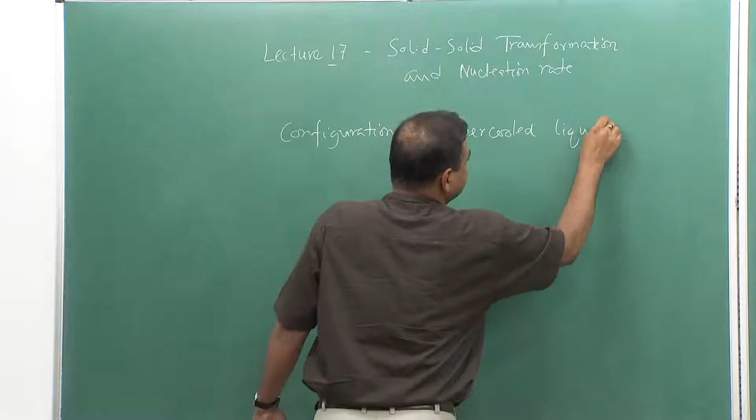But the classical definition of glass, if I consider, the definition is configurationally supercooled liquid. Configurationally supercooled liquid is basically a glass. From this definition, it is very clear: it's a liquid which is supercooled, and it's configurationally supercooled, meaning the liquid configuration is supercooled, and it forms a solid which is a glass.

This is a solid. In a short discussion, if we start cooling a particular material, let us say temperature, and this is melting point, and this is if we consider the viscosity. Generally, the viscosity variation of liquid form has a nature like this, which is actually related to Arrhenius increase, and a more refined situation for viscosity change with undercooling.

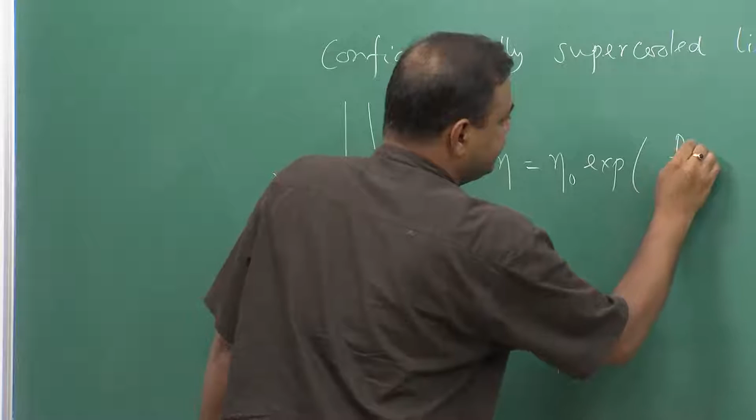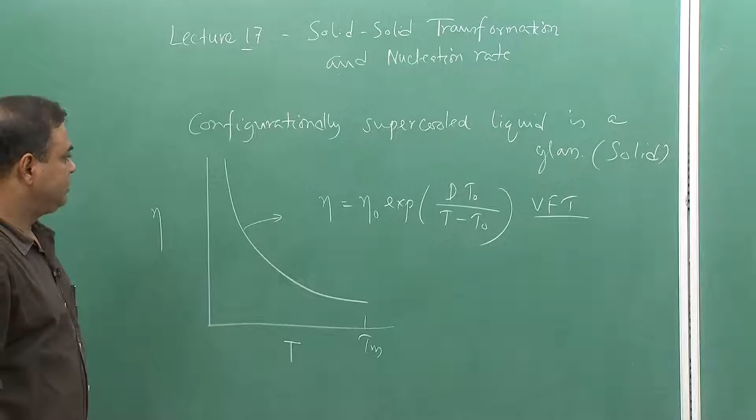We relate to η0 exponential, dT0 over T minus T0. So this is called the VFT equation, which is the Vogel-Fulcher-Tammann equation, and there this is called the fragility of glass.

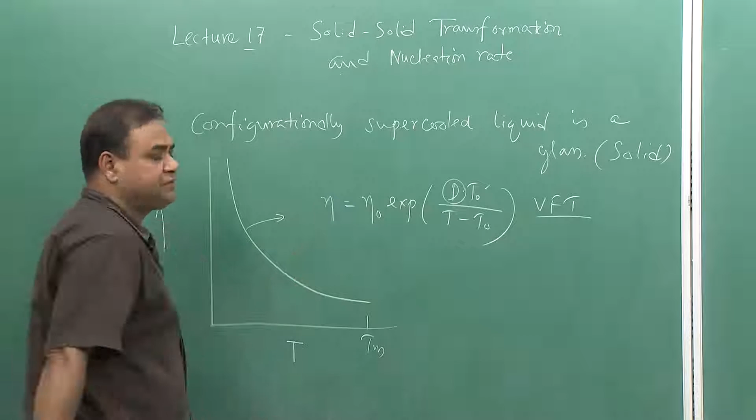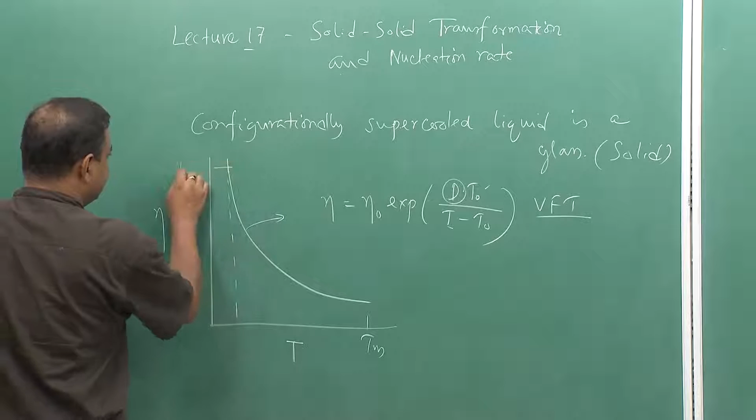Now this is a temperature which has a relation to glass transition temperature, and this is the temperature below Tm. Now if we see this viscosity, whenever viscosity reaches a value of 10 to the power 13 to 10 to the power 14 Pascal second, that temperature we call Tg, the glass transition temperature.

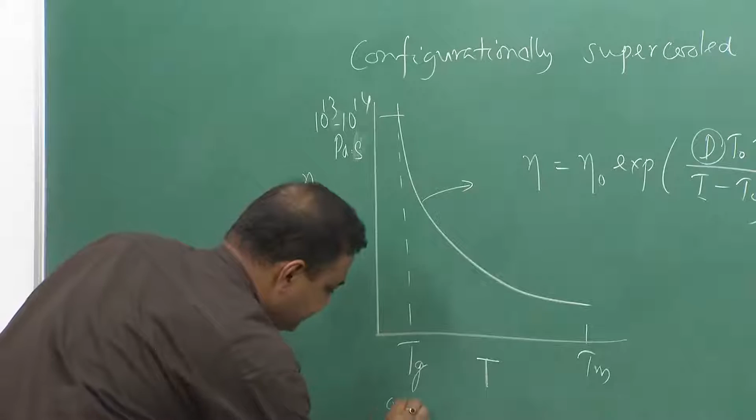Glass transition temperature. So at that time, whenever this viscosity reaches there, as we keep undercooling the liquid, it immediately stops the shear movement of atoms, and whenever the shear movement of atoms stops, that time we can call it a solid. So the liquid, without transforming to a solid of regular atomic structure, goes into a solid where the liquid configuration is maintained.

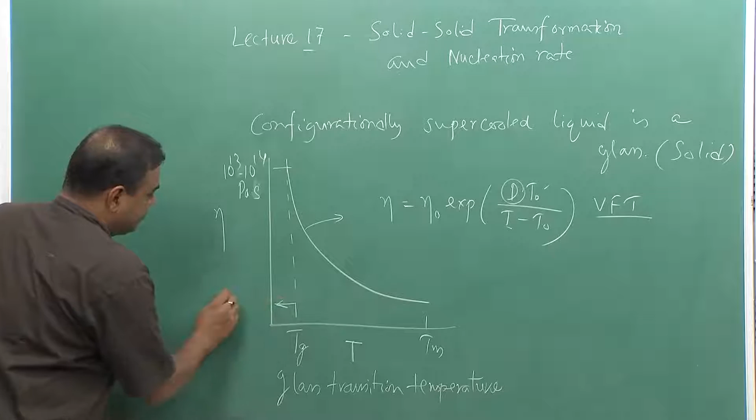So that is what is called glass. So below this temperature we form glass, and Tg is the glass transition temperature where liquid converts to solid. So this is a kind of situation where we do experience glassy alloys, and at that time the solid-liquid transformation is a critical issue.

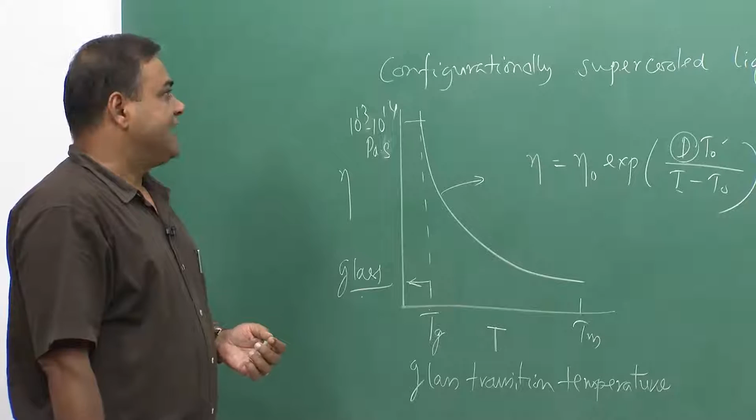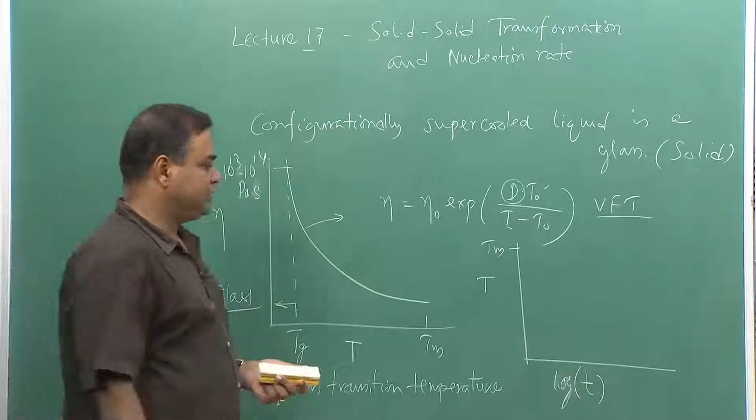At that time we can also construct a TTT diagram for solid-liquid transformation. If this is Tm, and generally we consider this axis in the form of log, because this time can become a large value, it can reach 10 to the power 5 seconds. So in order to put it on the same axis, we take the time as log.

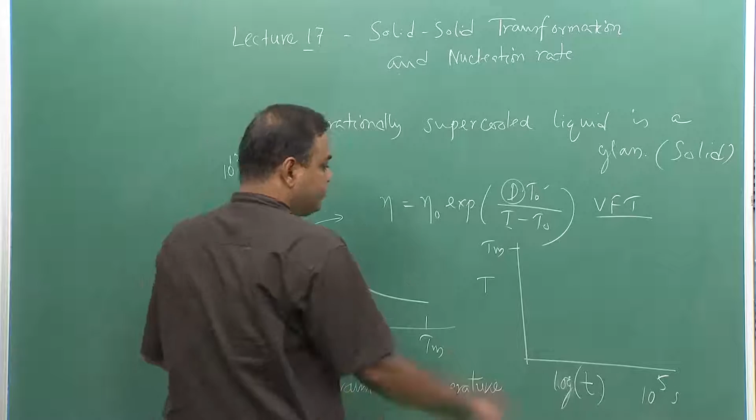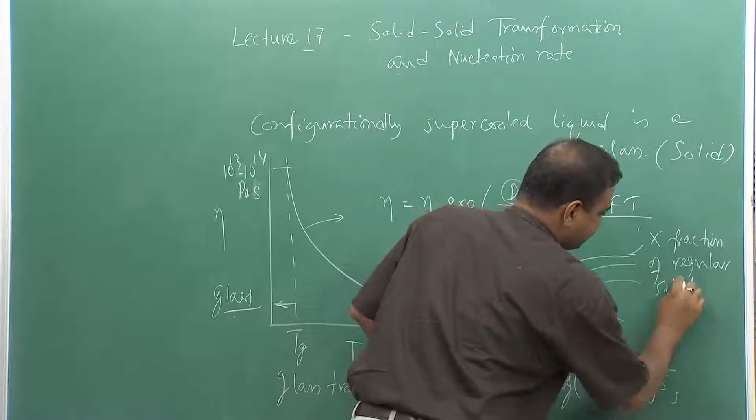So then the graph becomes like this. This is also a C curve, and these particular lines are indicating the fraction of transformation, which is regular solid formation. Regular solid means it's basically crystal.

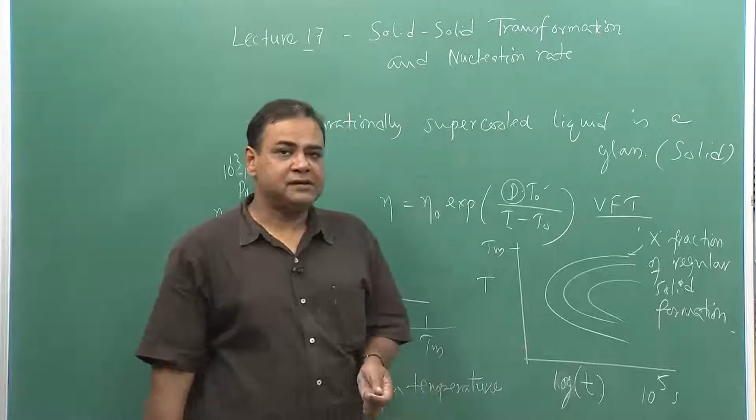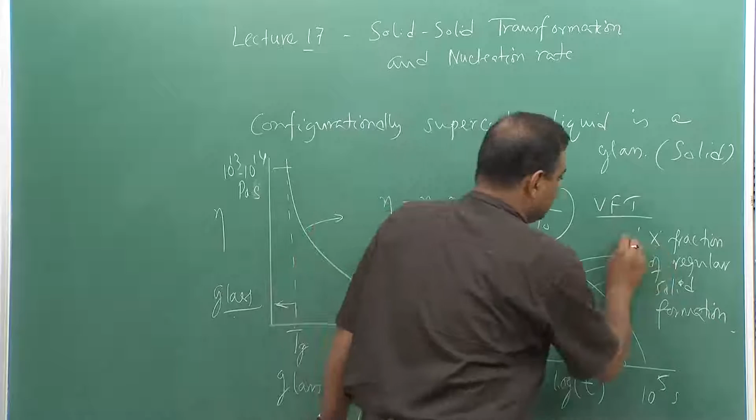In case of metallic systems, we do experience crystal and liquid to glass transition, and at the same time liquid to solid transformation at a different cooling rate. For example, if I see the cooling rate, then if this is my Tg, below this particular x value, if this x value is close to 10 to the power minus 6, then we say that below that point we cannot measure the amount of crystal.

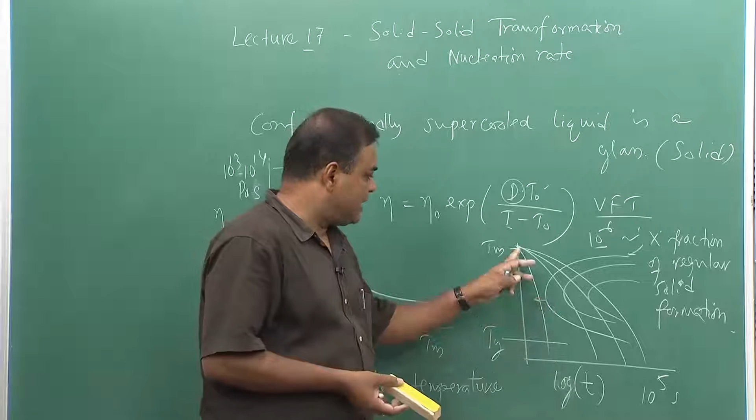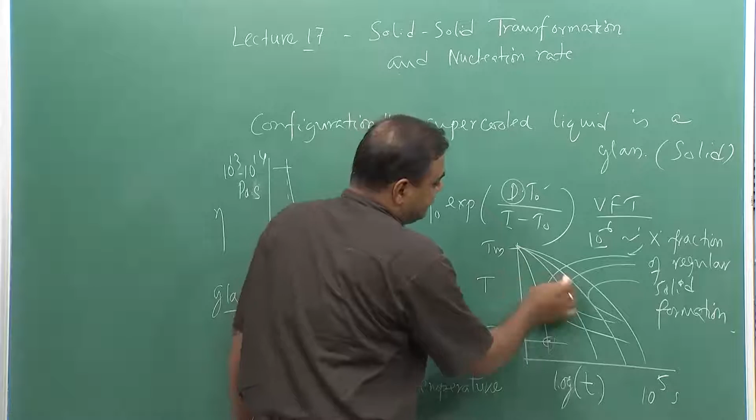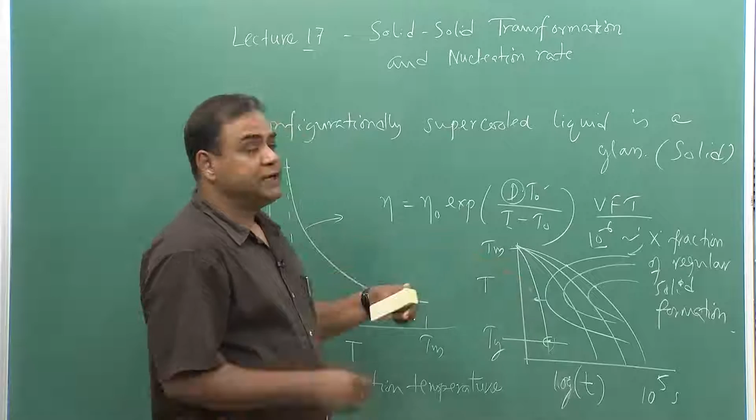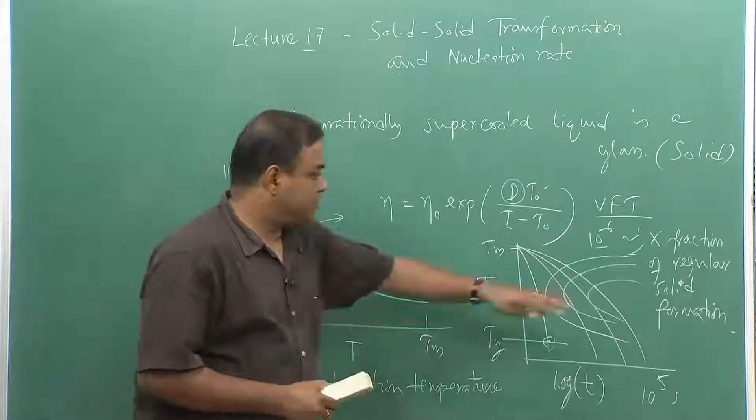That time we can consider it to be a liquid, and if my cooling rate is pretty fast, I can cross this particular C point, the maximum, the nose point, and then take this liquid to this temperature where glass formation is possible. But at other cooling rates, we see different fractions form, and whenever this cooling curve crosses any of those fraction lines, we say that much fraction of solid has formed in the liquid, and the rest remains liquid. This situation involves the solid-liquid transformation process, where the I value we calculated would be needed to plot this diagram. Of course, there will be one more parameter needed, the growth rate, which we will come across once we consider the nucleation rate.

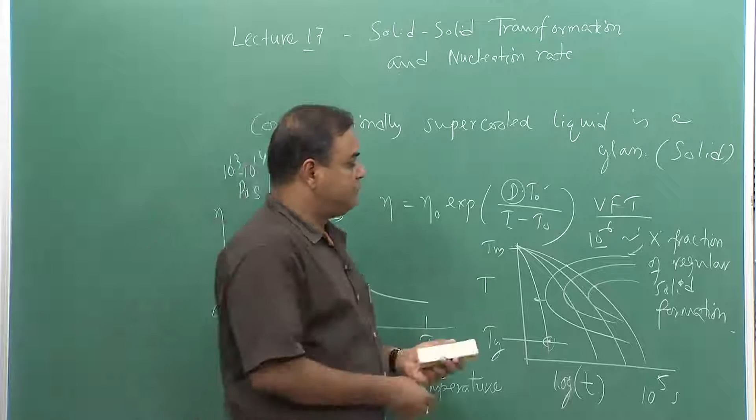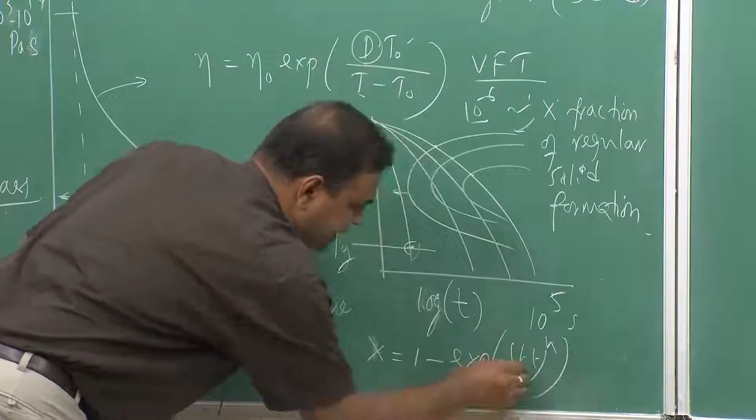As we have seen in earlier lectures, the expression x equals 1 minus exponential of minus kt to the power n, where k involves I as well as U. U is the growth rate, and that is what we need to measure, I as well as U, in order to get this TTT diagram. This TTT diagram will be valid for finding the kinetics of phase transformation from liquid to solid.

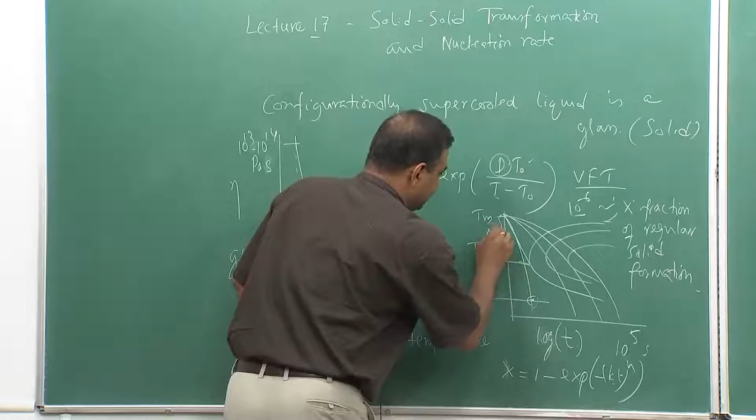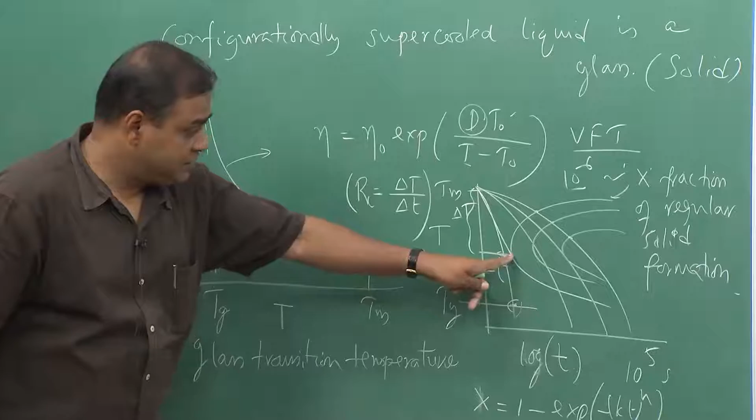So this is a kind of use of that I measurement. Of course, we will start looking at the growth rate soon. Finally, we can see whether the liquid can form glass or not, or whether it forms some crystal, and what would be the critical cooling rate for crystal formation. The critical cooling rate, Rc, is measured based on del T. This critical cooling rate means that if cooling rate is greater than this, moving towards the left, liquid would remain as liquid. So then I can take the liquid to the glass transition temperature, and it will form glass.

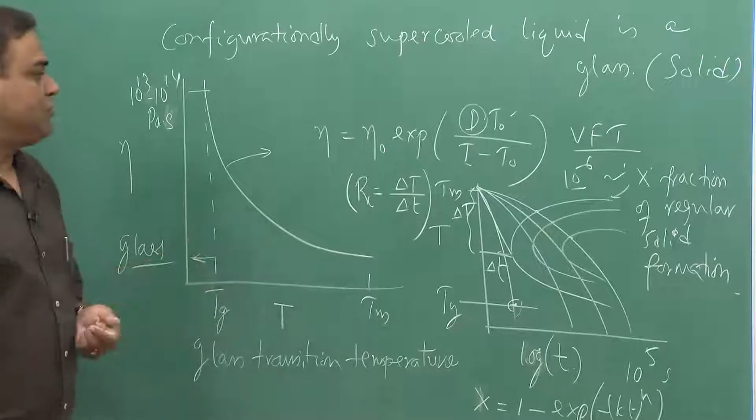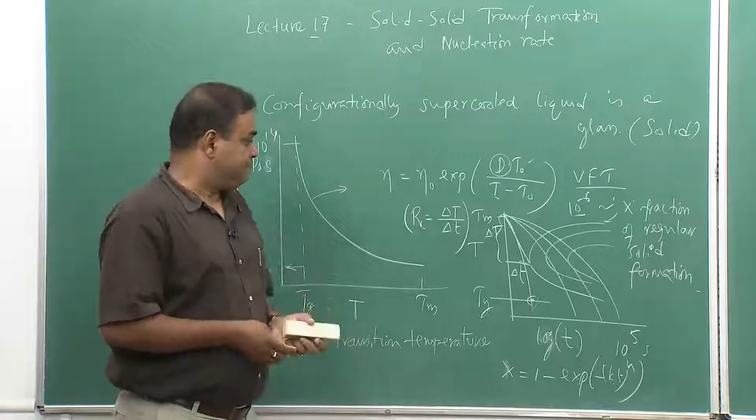This information will be taught in later lectures, but let us go to solid transformation, where we will also look at the nucleation rate expression, and before that see how the nucleation treatment is handled in case of solid transformation.

In case of solid transformation, the treatment would be almost similar to solid-liquid transformation, but there will be a little difference, and that difference comes in the form of strain energy. In the solid-liquid case, we did not experience this strain energy term, but here we do, and that makes a lot of difference. At the same time, the interfacial energy in the previous case was simpler, since half of those bonds are broken, but in the solid case it will be a little complicated. We will philosophically discuss why this interface energy becomes complicated.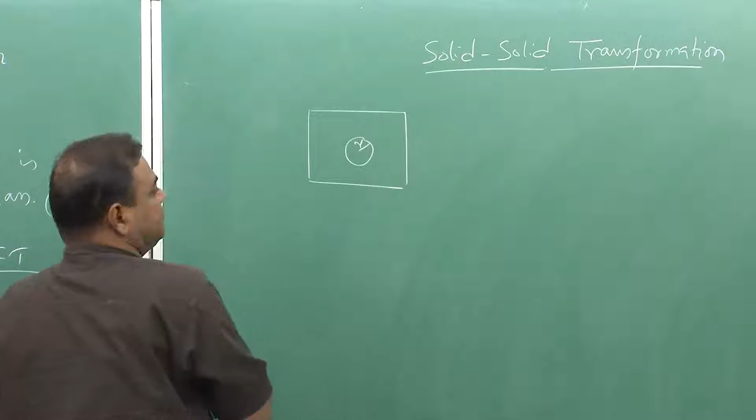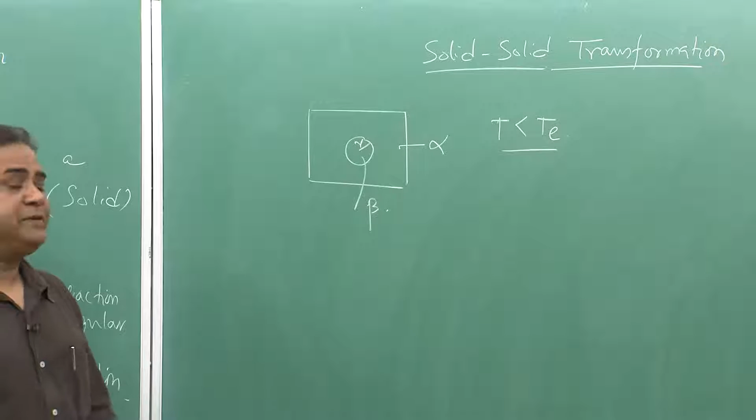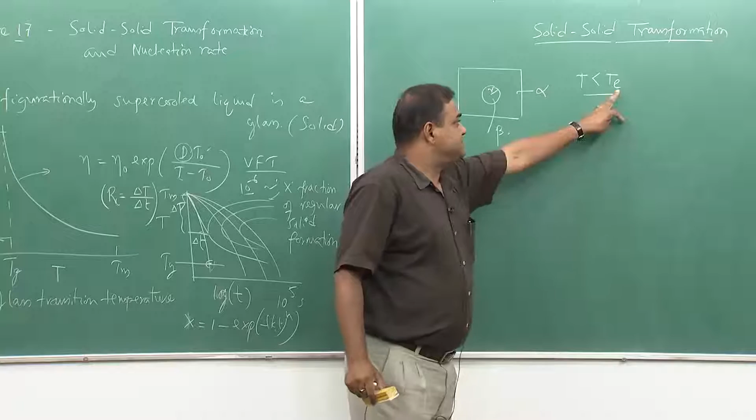If I try to see in case of solid transformation, initially we can consider homogeneous nucleation. They are also sphere forms of radius r, and that solid is basically termed as beta, forming in alpha at a temperature less than the equilibrium temperature. I am putting not Tm, but rather the equilibrium temperature. Tm is also an equilibrium temperature, used for melting, but here the transformation equilibrium temperature is Te. At this temperature, which is less than Te, the transformation takes place, with beta forming in a solid of alpha, and the interface forming is gamma alpha beta.

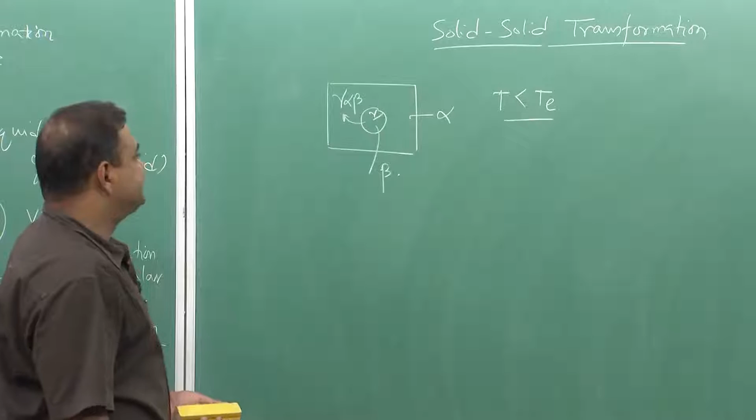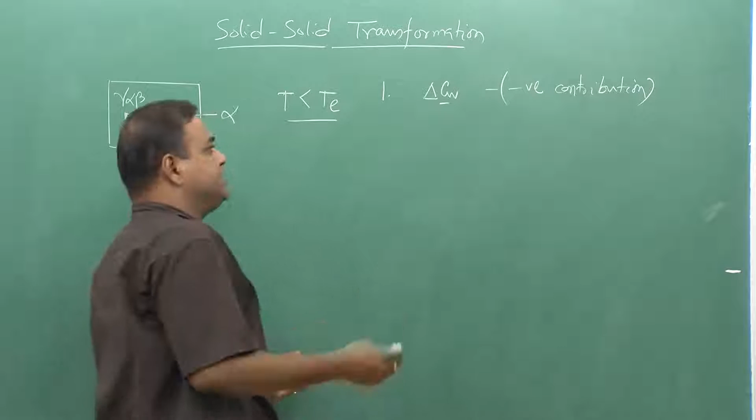Now what are the energy terms? Here also, in the beginning, we are not considering volume change. This volume is the same as before, and there is no net volume change. Now if I try to see the energy contribution, one is delta GV, which is a negative contribution, as we have seen in case of solid-liquid transformation. The second part is surface energy in joules per unit area, and that is gamma alpha beta, which is a positive contribution.

Positive contribution.

Now, if I try to see the total energy, that means if this volume is V, so it would be V delta GV with a negative sign, and if the area is A, so A gamma alpha beta. This is the total energy.

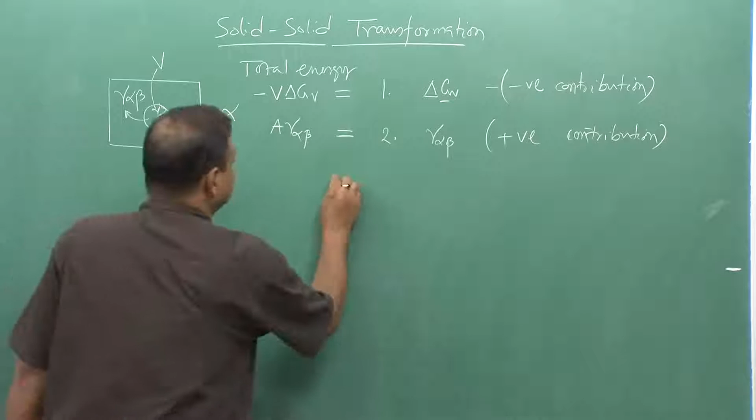Now, similarly, there will be a third contribution, which is the strain energy. Now, where does this strain energy come from? We call it delta Gs, and interestingly this becomes positive. Now we need to see why these positive terms come.

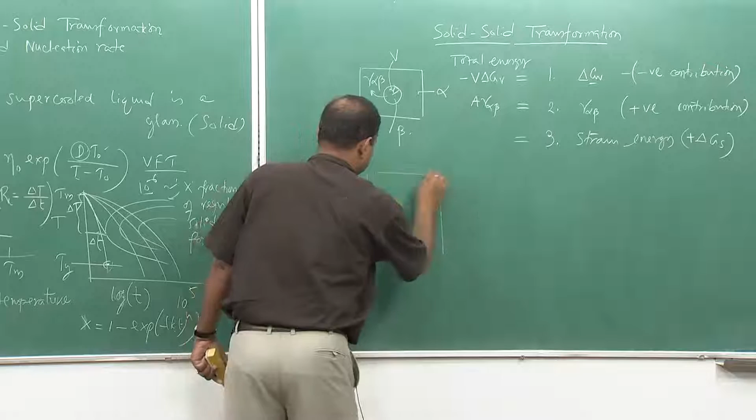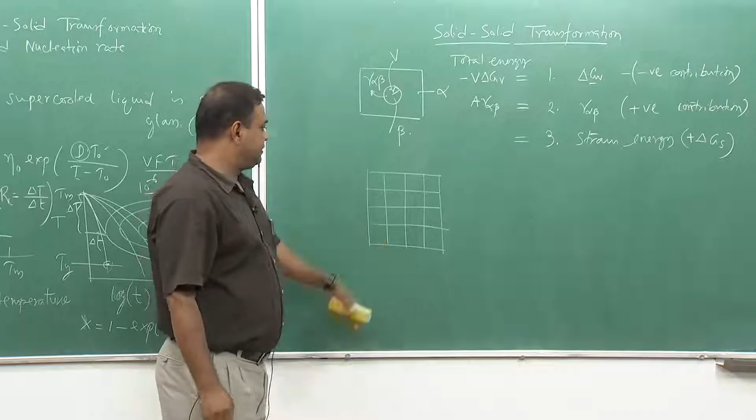Now if I try to see a solid, we can extend it in 3 dimensions, but let me do only the 2 dimension part. We see that if the solid is a regular crystal, the atoms are arranged in a periodic manner.

Now if this is the alpha phase, there could be a second phase which can appear. This second phase can appear like this in this volume, and if this is the alpha lattice parameter, A alpha, and this is my second phase, which is beta, then in case of beta, the lattice parameter is A beta.

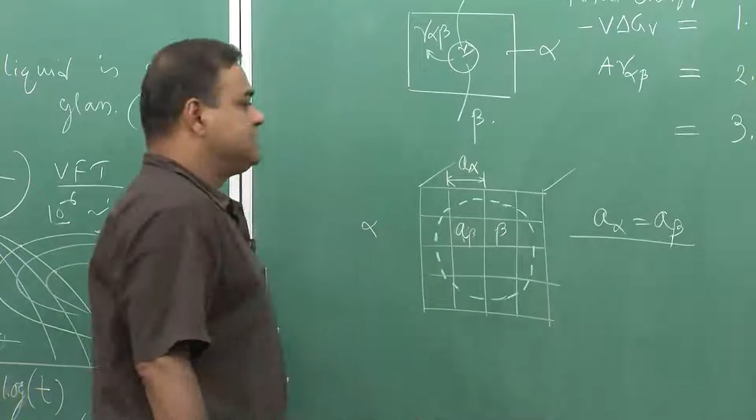From this it is clear that there is no volume dilation, because before beta formed, everything was alpha, and after formation of beta, this lattice parameter does not change. So A alpha equals A beta, meaning the lattice parameter of the parent phase and the product phase are both the same, and at that time there is a perfect alignment of those planes.

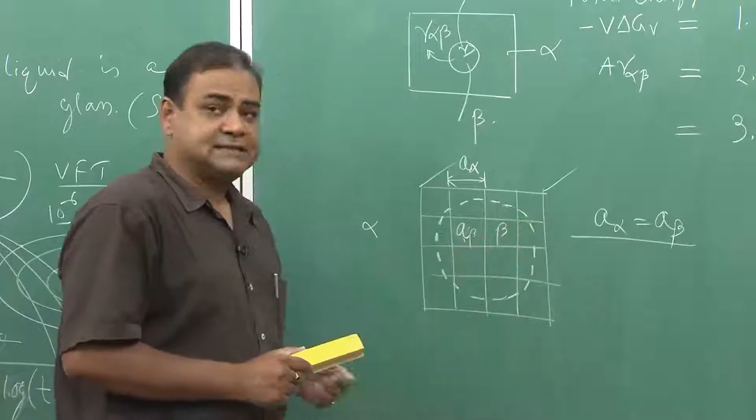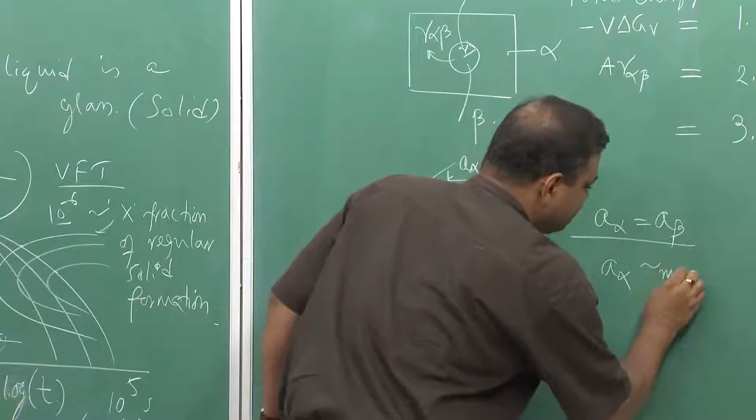But whenever we have a perfect alignment of those phases, it is not necessary that there would be a perfect alignment of these lattices throughout the body. It may happen that A alpha is slightly more or less than A beta. So the situation would be a little different.

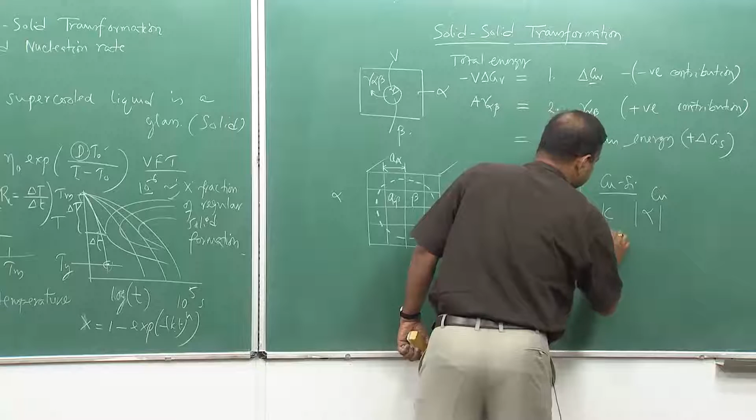Now whenever we talk about this situation, it can happen either in a pure metal or in an alloy system. For example, to see a complete match, let us take copper-silicon alloy, where we form a silicon-rich phase, kappa, while copper is the parent phase, alpha, and silicon-rich kappa is the product phase if it forms.

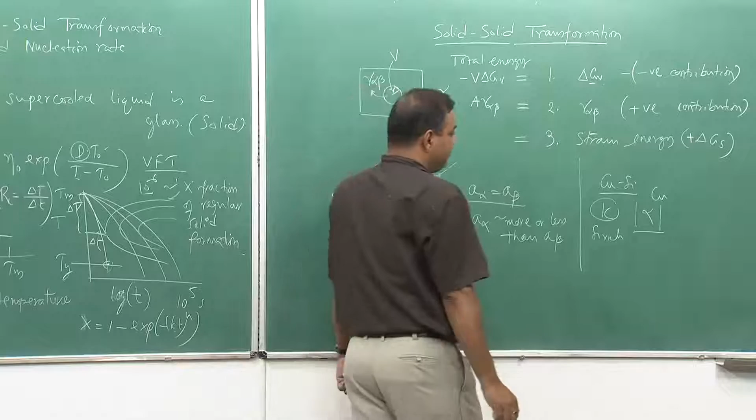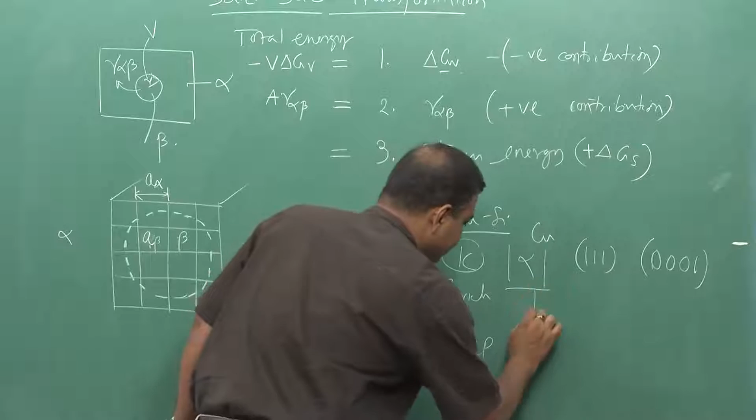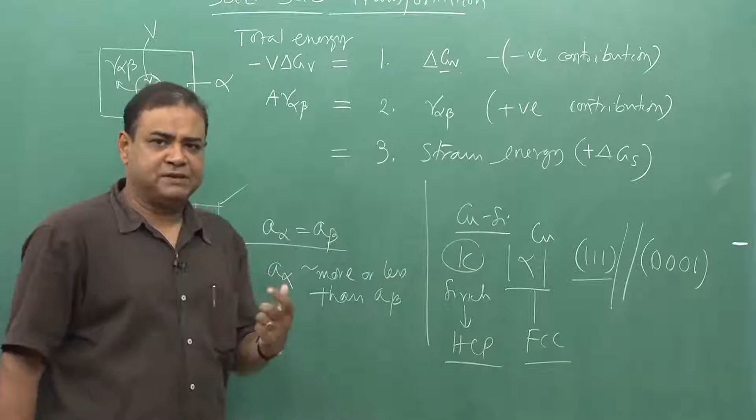So we see the 1 1 1 plane as well as the 0 0 0 1 plane for these two planes of this crystal, because this phase is HCP and this one is FCC, hexagonal close packed and face centered cubic respectively. This plane and the basal plane of the HCP are parallel, and at that time these two atomic arrangements have absolute similarity, so in that case they will have a perfect match.

And at the same time, the 1 1 0 plane would be parallel to the 1 1 2 bar 0 plane, using the direction notation. So this would be the situation. Now how does this come about? Let us look at that part.

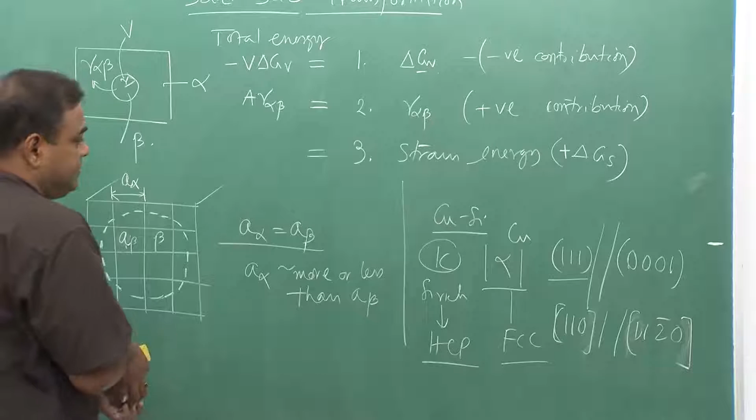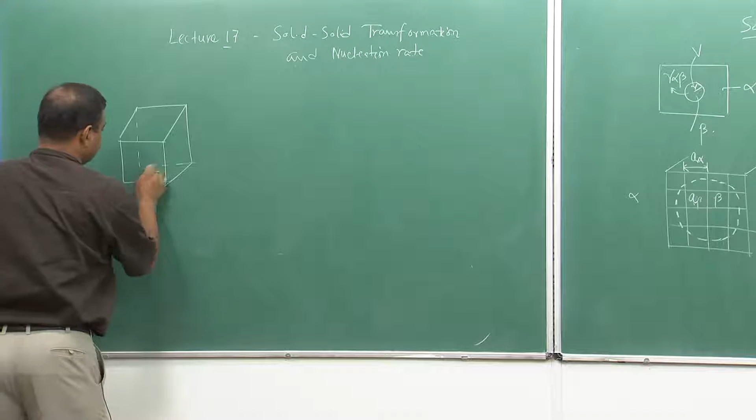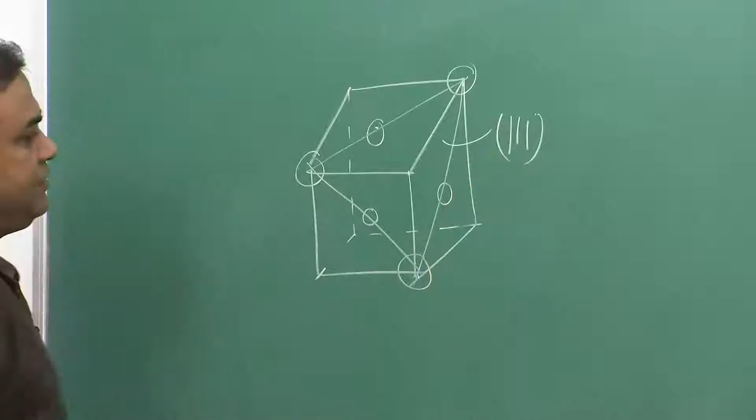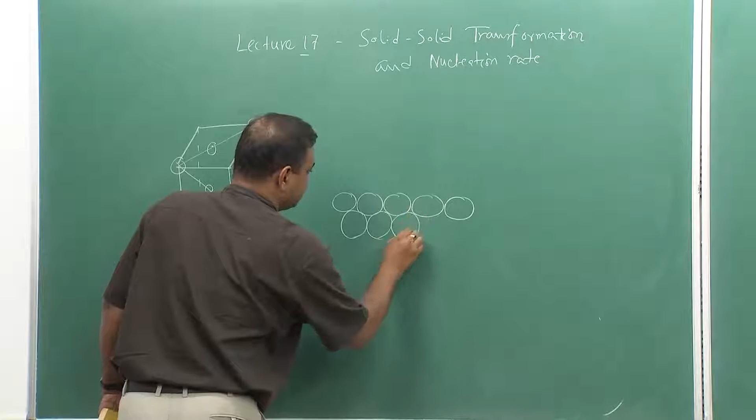Now if we see a face centered lattice, let us say this is the 1 1 1 plane, the atomic arrangement would look like this if I start drawing it. Now, looking at the plane where these atoms lie, this is the face centered plane, this is the face centered plane, this is the face centered plane, and these are the corner planes. The atomic arrangement is like this.

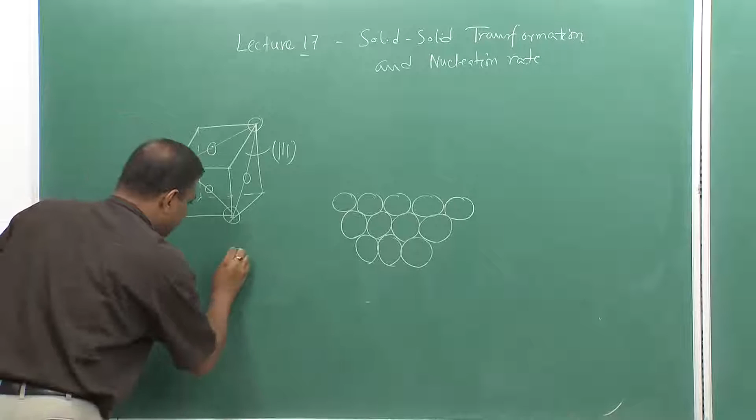Like this. So, would we see some atomic arrangement there? Yes, we do see an atomic arrangement like this. So this is that plane. So this is the corner atom, this is the face atom, and this is corner, these three are face. Similarly, I am seeing that particular arrangement.

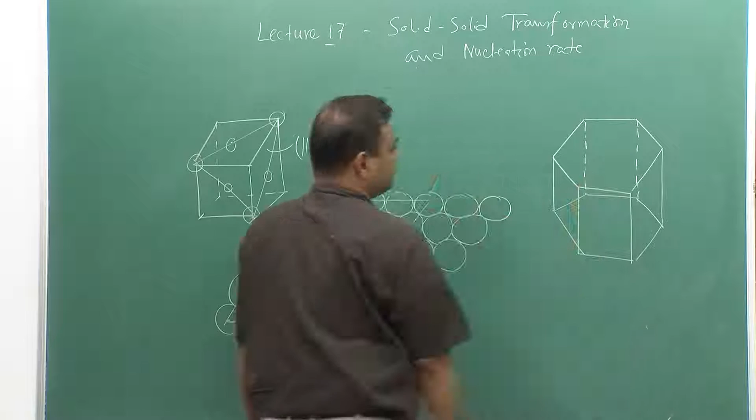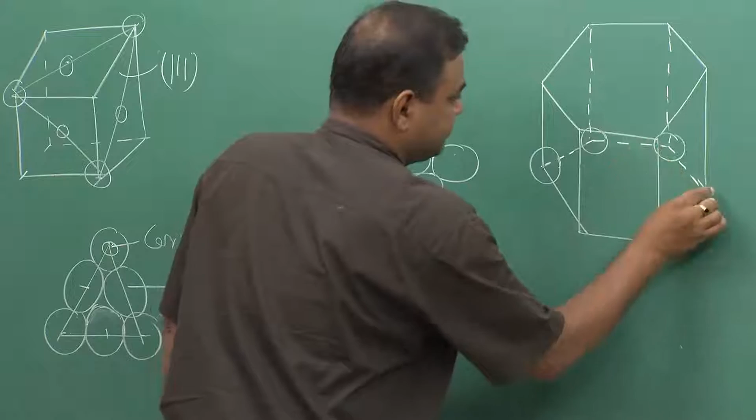Now, if I try to draw a face centered and hexagonal close packed comparison, let me draw this particular plane as a dotted line, so then things will be clear. This is the back of the plane, back of the face. So this is the situation, and now in that case the atoms are arranged like this. Though I have given a lot of space, the atomic arrangement will be like this.

This is the atomic arrangement. If I see this, so this is the arrangement.

Now if I see this, do we see anything like this? Yes, we do see that kind of thing. If I do it with a different color, then it will be clear.

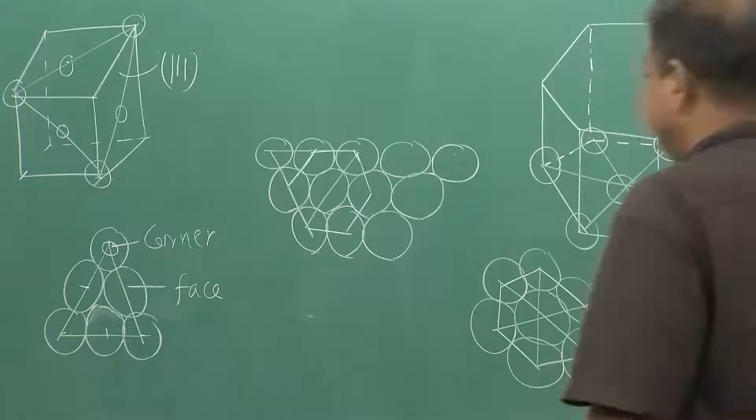So I see that if this face is parallel to this face, then there will be exact matching of the planes, okay, planar atoms. At the same time, if I see the direction, this direction, and in this case the direction like this, then in case of 1 1 2 bar 0, that means 1 1 2 bar 0.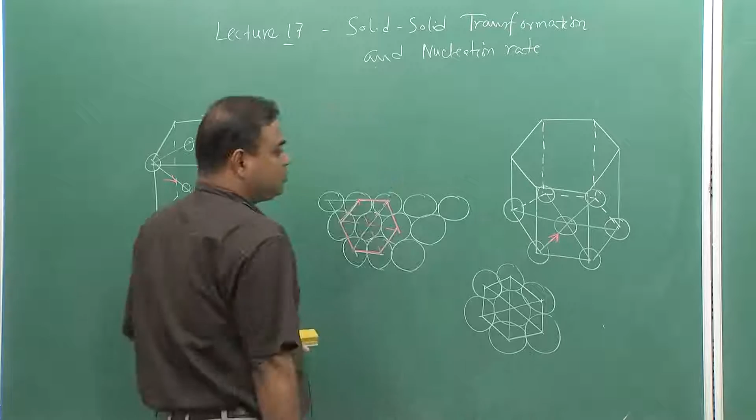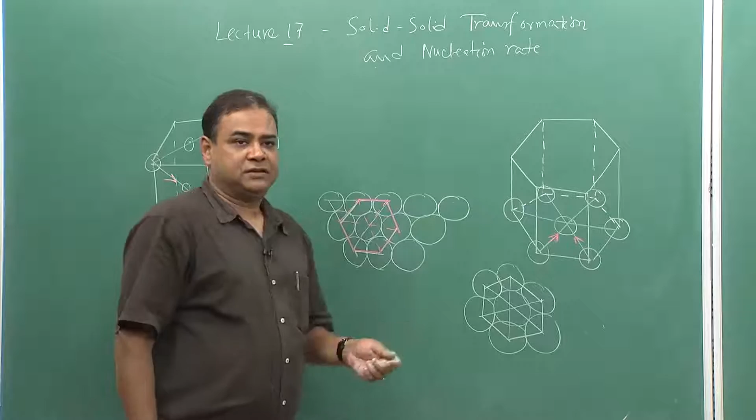So it would be one of those kind of directions. Now we have seen that direction-wise also these directions and these directions are parallel. So this is 1 1 0. So this direction is one of those 1 1 0 group of directions, and here these are the 1 1 2 bar 0 group of directions. So they are also parallel to each other, and that is why they have a very good match.

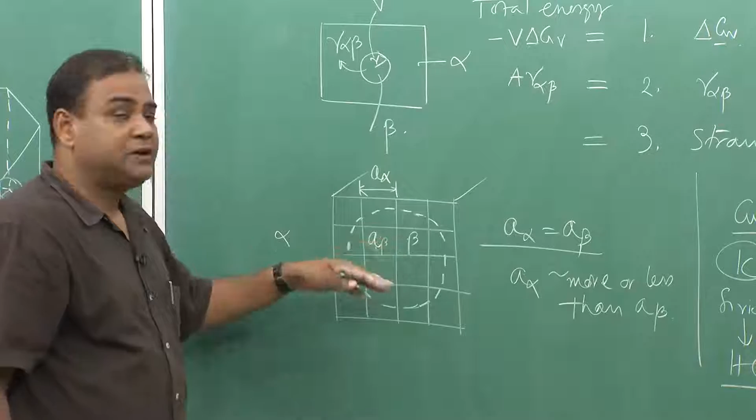But of course, if we have this kind of phase formation, alpha in a beta, beta in a alpha, we have an interface between alpha and beta. That interface energy is constituted by the chemical effect, so we have gamma chemical.

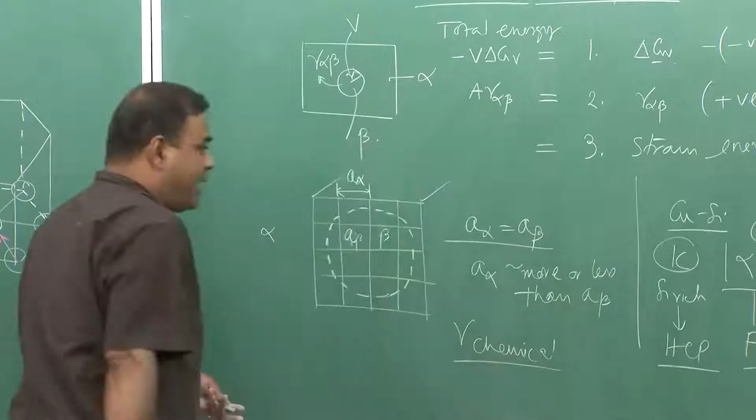But the situation would be different if we do not find such kind of match. In that case we experience another kind of energy which is called structural interfacial energy. Let us look at that part. Now, let us draw it first.

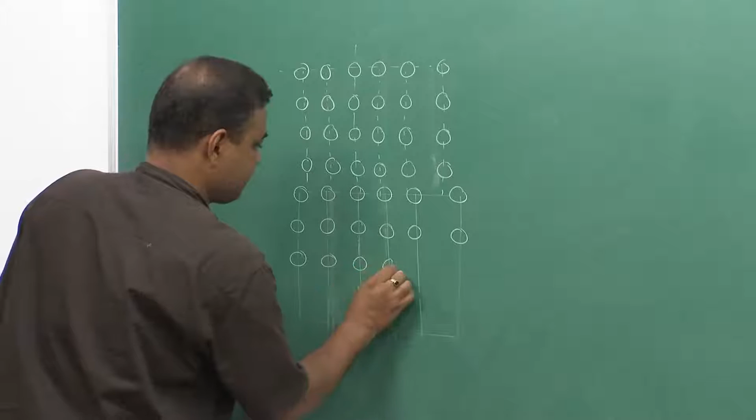If we see this particular arrangement, now these are, let us say, alpha atom, and these open squares, open circles are beta atom. There is an interesting thing. If we see this, this is, let us say, A beta, which is the lattice parameter, and this is the A alpha lattice parameter.

I see there is an interface along this line, but at the same time I do see that these lattice, there is one lattice plane which is perfectly matching, it is perfectly going through. Now there are other lattice planes which are not exactly matching. For example, if you see this, there is a little deviation, so from here to there is a little deviation. But the system would always like to have a match.

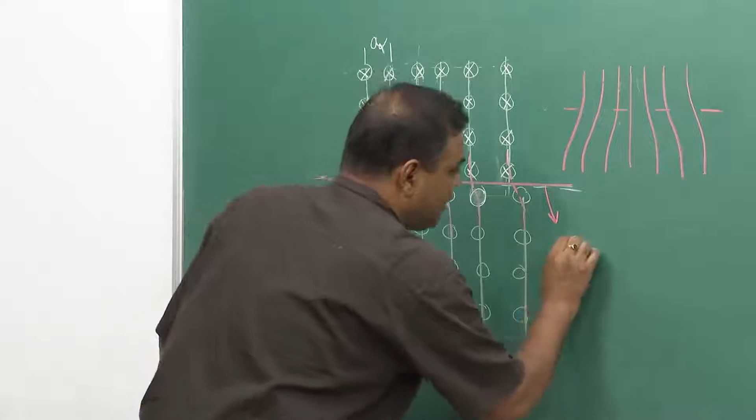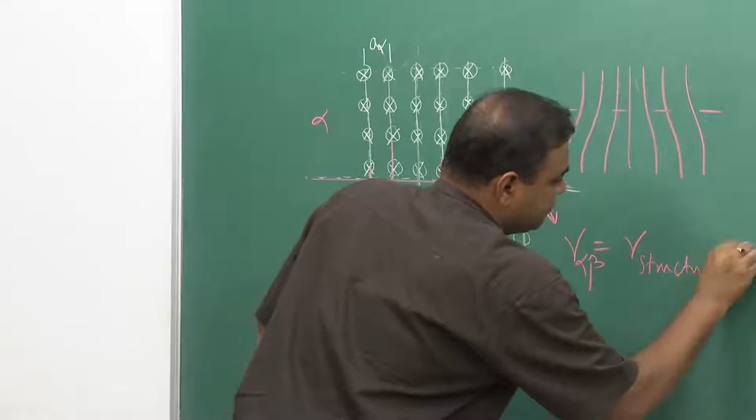So, like this, this is the interface, same as like this. So at that time these interface is having two contributions. One is gamma structure, this is alpha beta, let us say this is beta, this is alpha, gamma structure plus gamma chemical, and out of this, the structure part is related to the lattice distortion.

You can see this, in order to have a match, these lattice are not flat, not straight, rather they are distorted, and this distortion is going inside the lattice. So distortion has started from here, it has gone inside. So this distortion is actually trying to distort the lattice, and this lattice distortion is related to the structure effect.

That means, because of the structural matching, they are having distortion, and this is called distortion or straining of lattice. And whenever there is straining of lattice, it would also associate with some energy which is called strain energy, and this strain energy is not situated at the surface, rather it is going inside the volume.

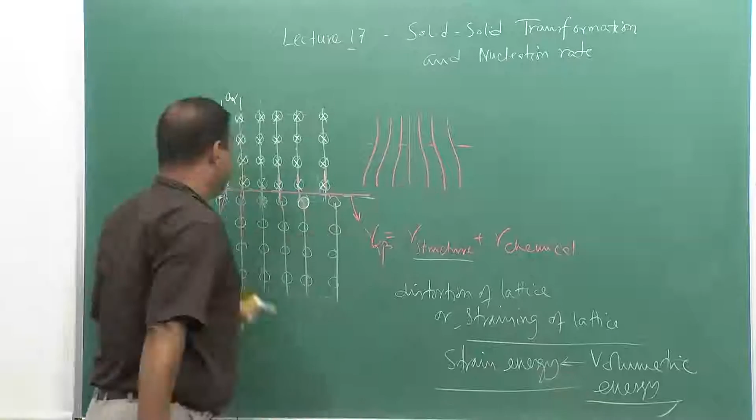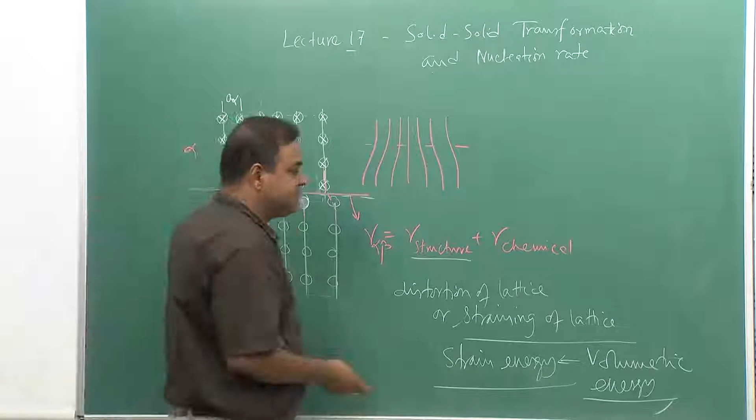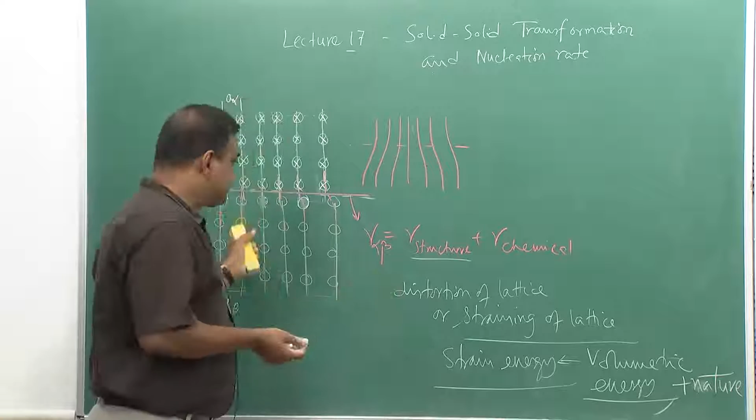That is what this is, a volumetric energy. And another thing, this volumetric energy is to be created in order to have this match, in order to have this beta, and that is why this is having positive nature. So that means this volumetric strain, which is strain energy, has a positive sense, and this is coming from distortion of lattice or straining of lattice.